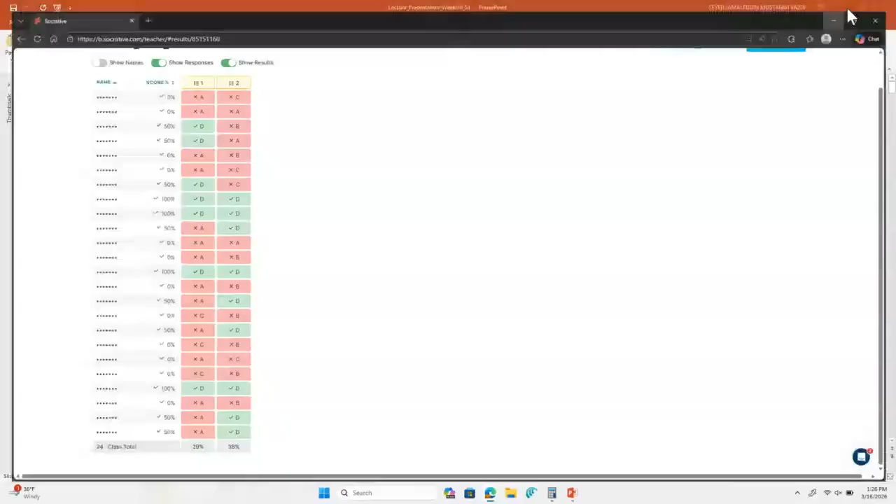For your reference, that's how much you studied. Look, first question, 29% answered correctly. Second question, 38% answered correctly. Okay, guys, please make sure you study the previous sessions and also the previous lecture. The final exam is coming soon.

Now, for the first question, the relative velocity equation VB with respect to A. If you remember, in the previous lecture we started to talk about general plane motion, and I explained that we can write the relative velocity equation. This is the relative velocity equation. We can also write this one as VA plus omega cross product of RB with respect to A. First, this one is the relative velocity of B with respect to A. It is correct.

For general plane motion, there is a combination of translational plus rotational motion. If you remember, for this general body, first move it, then rotate it. For example, this is A and this is the B point. This goes here, this goes here. This is the translational part. This is the rotational motion part.

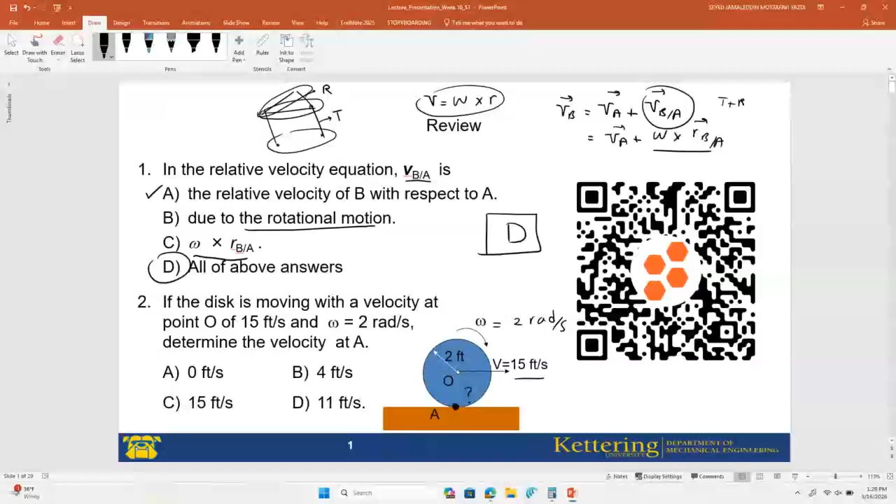Now, for the second question, this disk is moving with a velocity at point O of 15 feet per second. Omega is 2 radians per second. Then we want to find the velocity of point A. To find this one, look at the equation of motion that we can write, from the total one I wrote on the previous page.

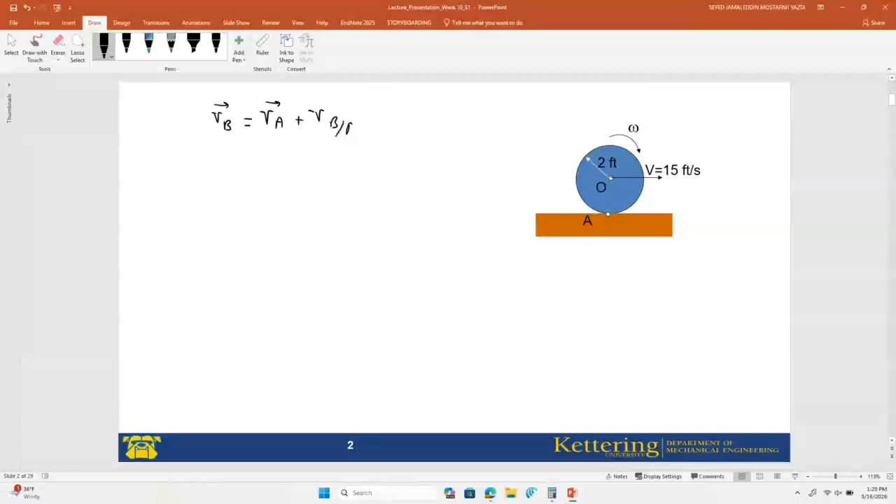Velocity of B equals velocity of A plus velocity of B with respect to A. I can write this one as velocity of A plus omega cross product of RB with respect to A. Now, here, as you can see, we have point O. This is similar, just instead of point B, I will replace it with O.

Just replace it with the O. Replace it with the O. That's it. Now, this will be VO equal to VA plus the VO with respect to A, or equal to VA plus omega cross product of the RO with respect to A.

Okay, now we just need to write them in terms of the vector form. Now, velocity of the O, it is 15. Which direction? This is X, this is Y direction, perpendicular to the screen, it is Z direction. Outward, this is Z. And also, these are I, J, and K. They are unit vectors along X, Y and Z. Now, this one, it is along the I direction. Okay?

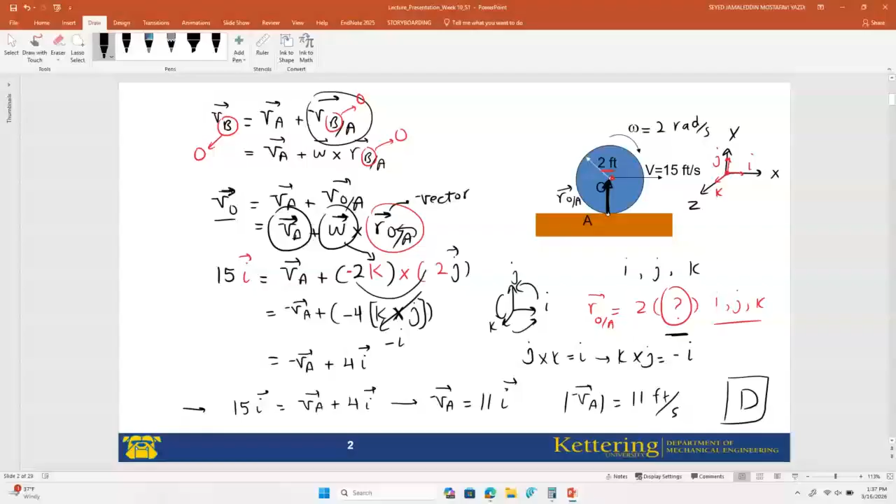Any questions? Any question, guys? Okay. Now, can I move to the next slide? Yes. Okay, Drew. Thank you, Josiah. Now, for this question, as you saw, this is D. Both are D. They are the answers.

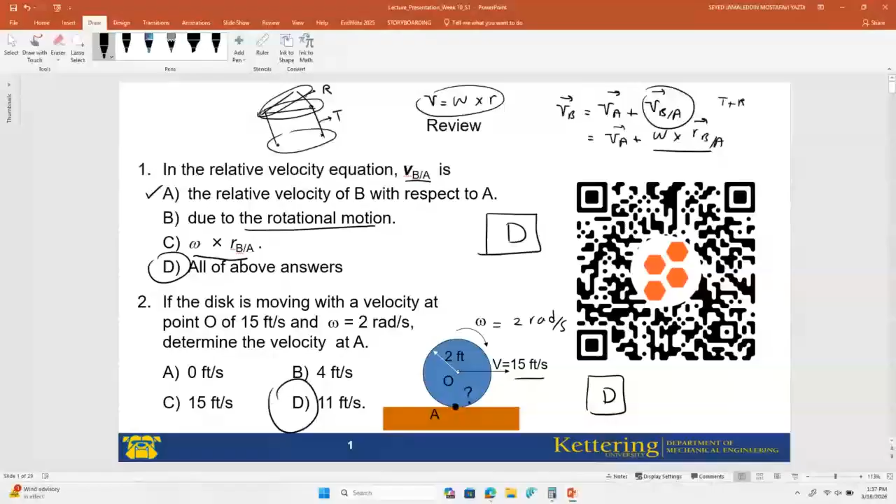Now, I want to announce about the final exam. Just a reminder that we will have the exam on Thursday, March 26, 10 a.m. Please bring your own calculator, and pen, pencil, that's it. I uploaded the equation sheets in week 11. You can access that now. You know how to use it. I will print it; you do not need to print and bring anything. I will bring it same as exam 1 and exam 2.

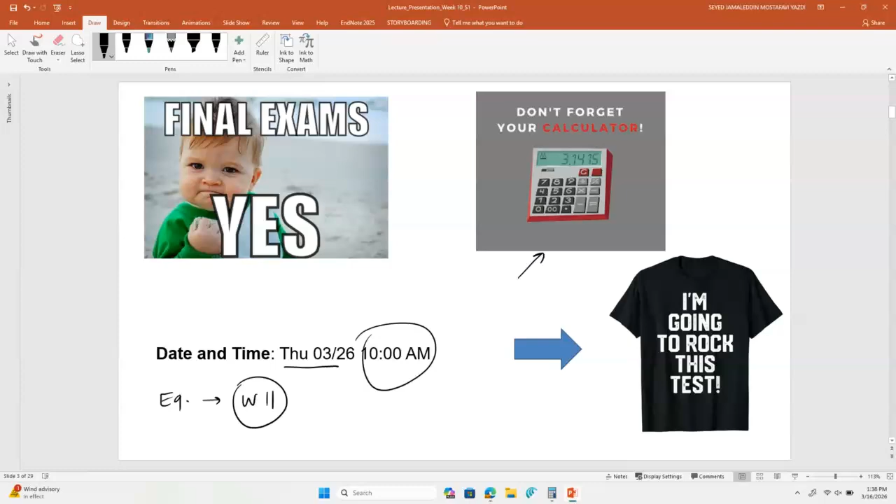The final exam will be cumulative, similar format to exam 1 and exam 2. For example, question 1 is multiple choice, and questions 2 to 5 will mostly come after exam 2. But you need to use some of the equations, directions, and coordinates you know. We will have a review session so you can be familiar with questions similar to the final exam. Some may come, or other ones will come. This is for the final exam.

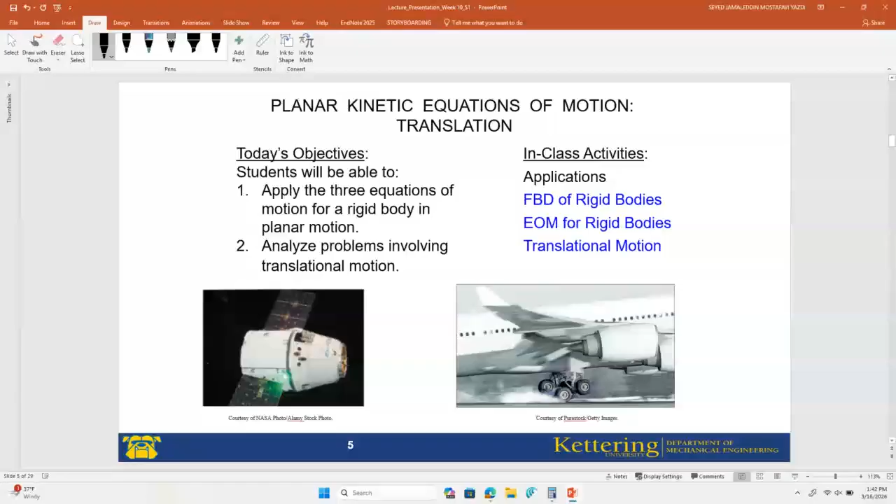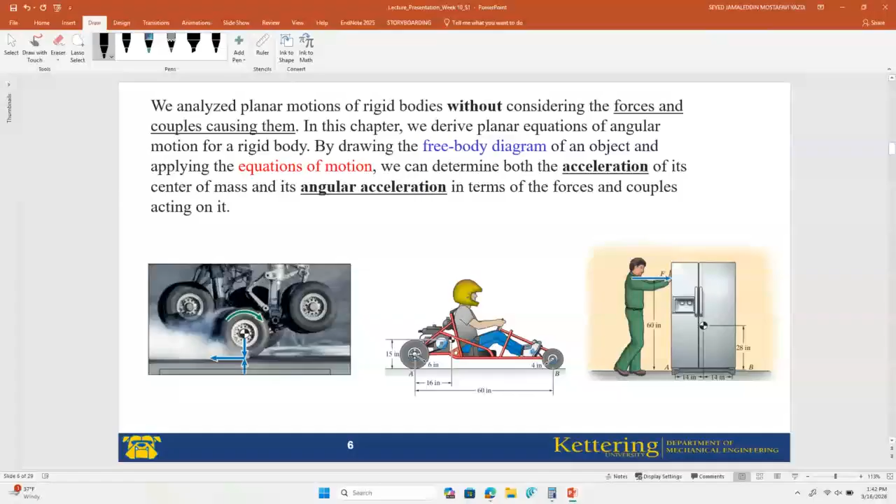These external forces are the rear normal force, the front normal force, weight, and frictional force. These are examples of these external forces. And also, you will see here that we apply the weight at the center of gravity. And also, there is a moment. Sometimes in the car example there is no moment. However, consider I apply a moment. This is a type of external moment. For this case, we want to write the equation of motion.

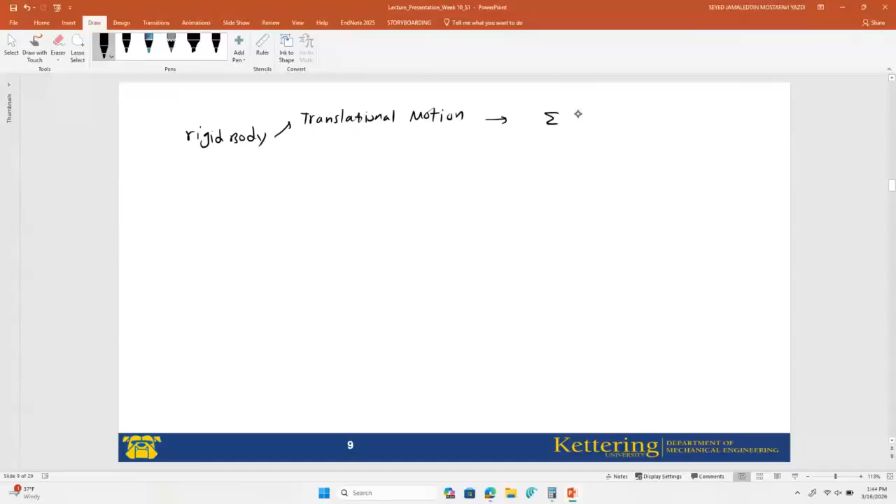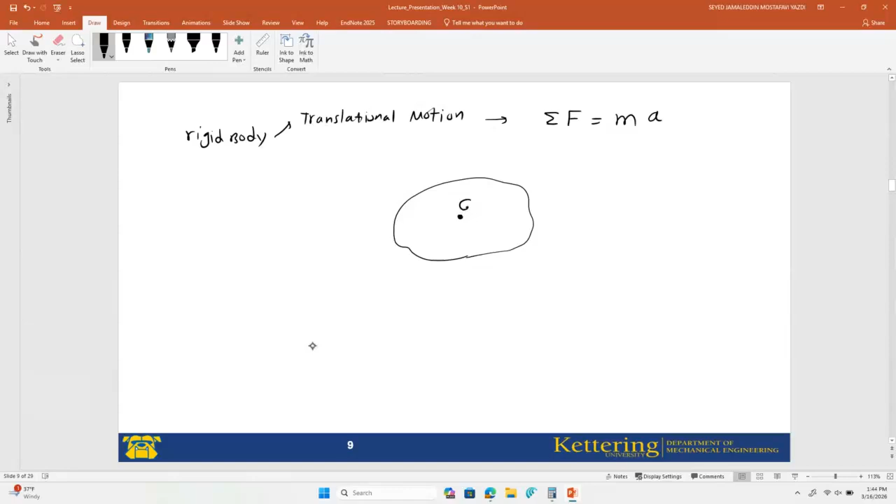First of all, as you learned before, for a rigid body that has a translational motion, we will use the equation of motion. You know about the equation of motion. It's the summation of the forces equal to ma, for this rigid body. Now, this rigid body has a point called the center of mass. G is the center of mass.

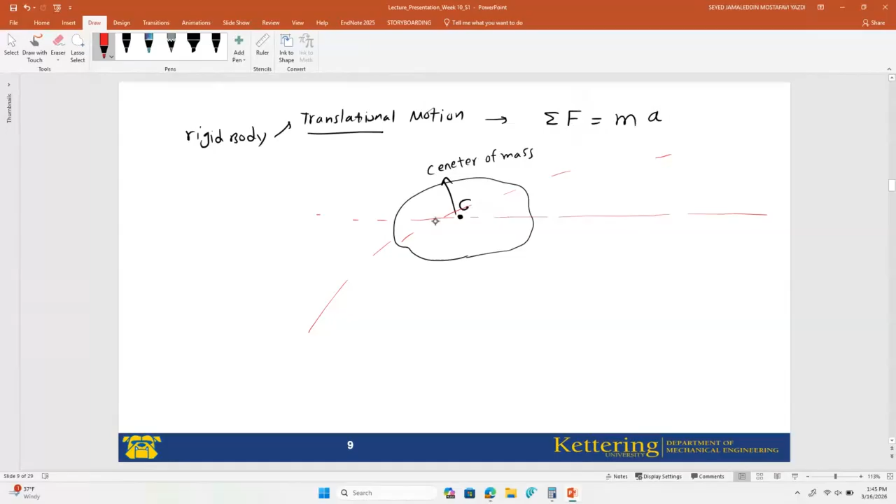A translational motion means, for a simple and basic case, if you follow the position of G over time, for example moving on a straight path, this is called a translational motion. Or G is moving along a curved path, for example this one. This one is also a type of curvilinear motion.

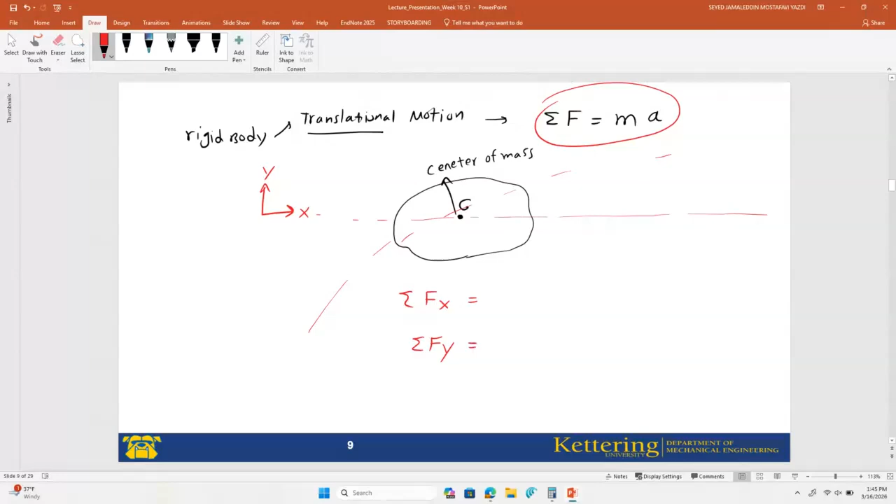Now, to write the equation of motion for this body moving in a 2D plane, in the x and y directions, we will develop the equation of motion along the x and y directions. We will find the forces along x and the forces along y, and they are equal to the mass of this rigid body times its acceleration.

Then instead of this acceleration, if you remember, we just used this one for one particle. Now this one has several particles. Instead of adding and finding this one for each particle, we will find the center of the mass. Then we will find the acceleration of the center of the mass along the x direction. This is the acceleration of G along the x direction.

Same as this one for the y direction. We can write this one, mass multiplied by acceleration of the center of the mass along the y direction. For example, this is m a_Gy. These are two equations that we will use for a rigid body that has a translational motion. Okay, you learned it from the previous lecture. This is nothing new, just a review.

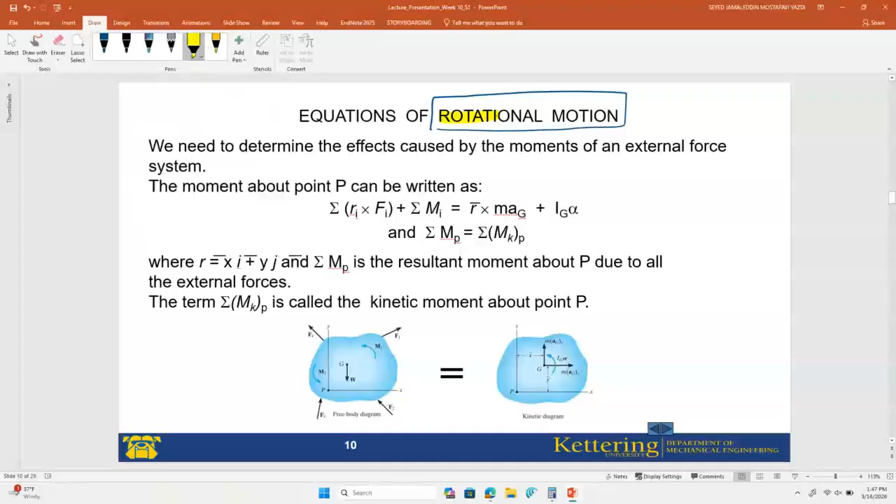Now we want to know how about a rigid body that has a rotational motion? What about the rotational motion? What type of equation should we use? For this one, we will use this equation. As you can see, this is an equation of motion for a rotational one. I will highlight this one. Oh no, this is not. This is only for rotational motion, as you can see.

What equation will I use? I will use this equation or this one. This is the general form of this one. These are equal; these are not two separate equations. These are equal to each other. And then, what are these equations? These equations are the moments about P. These are the moment equations. What is the moment? This is my question for you.

If there's a bar and I apply a force F, and this has a distance of L from the support, the moment at the support will be F multiplied by distance L. Similar to this one. If we find the moments of the forces and the external moments, left hand side, as you can see here, this expression is the moment of external forces. This is all external moments. For example, I can apply only a moment at the tip of this bar or beam.

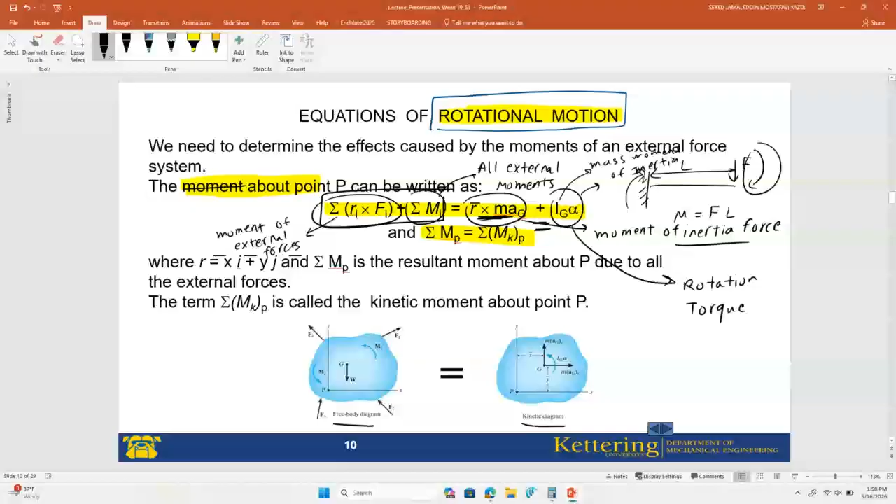As you can see here, we will draw a free body diagram and kinetic diagram for each problem. For the free body diagram, we will show the external forces and the moments. That's it for the free body diagram. In the kinetic diagram, we will show the inertial forces mA on the center of the mass. As you can see, there are inertial forces along x. It is m a_Gx. The inertial force along the y direction is m a_Gy. And also, this one is because of the rotation, I_G alpha. This is kind of rotation.

This G point has a distance from the point P. From the x axis it is y bar, and from the y axis it is x bar. These inertial forces have a moment. Why? For example, I just open one slide. Look, for example, a big one for you. This is the point P. This is the center of the mass. This point P can be any point on the body.

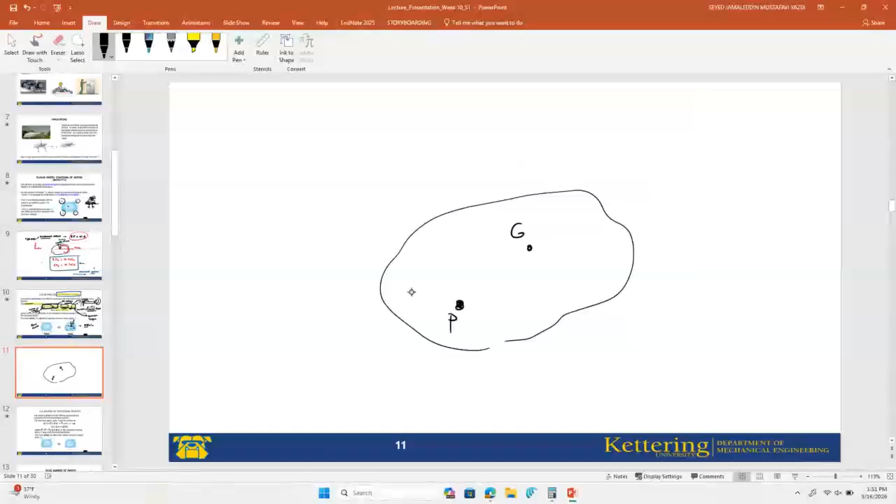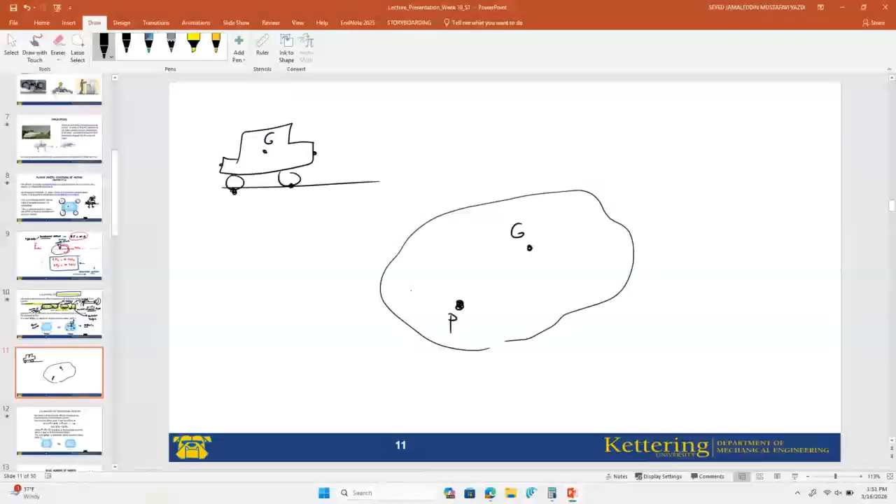For example, for the car, we have center of mass G. This point P can be on the rear tire, front tire, the front of the car, the back of the car. Any point can be this point. Now, this is the inertial one, m a_Gx, along x. This one has a distance along y. For example, I'll use that previous one for you. This one is y bar, and this point also has this distance of x bar from the point P. And also, this is m a_Gy.

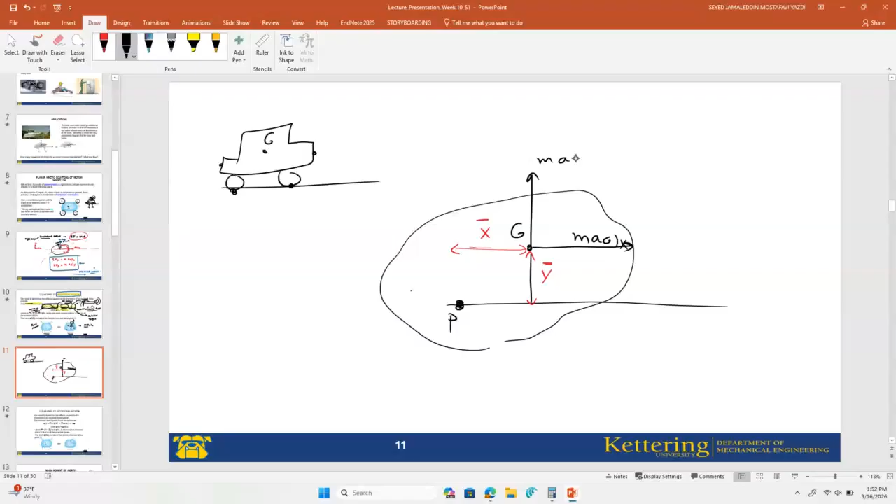Now, question. What is the moment of m a_Gx about point P? Can you write it in the chat? What is the moment of m a_Gx about the point P? It's okay, just write whatever. You do not need to write exactly what I write on the slide. It's difficult to write in the chat. If you write it, I can understand. What is the moment of m a_Gx about the point P?

What's the moment? m a_Gx times y, I_G alpha, okay, other students. I'm just collecting your answers. Please answer this one, thank you.

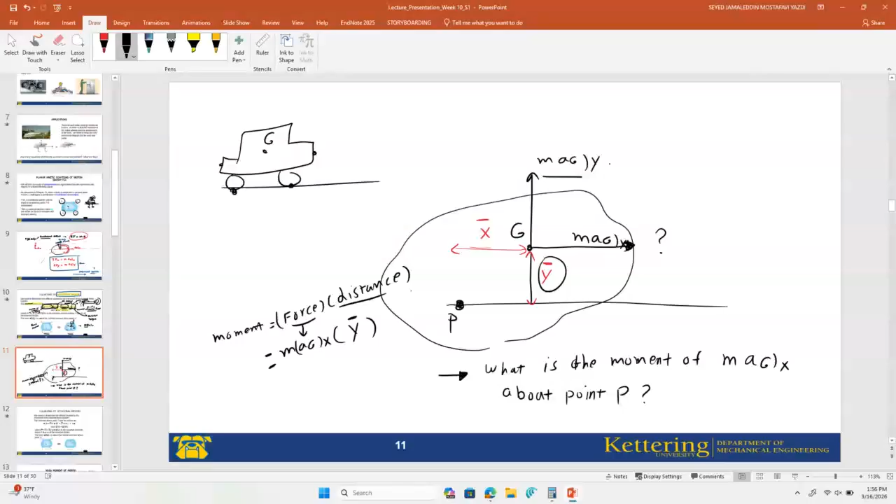Okay. Then maGy also has a moment. What's the moment of this one? It will be maGy multiplied by x bar. Okay. Now, this is the moment. These are not IG alpha.

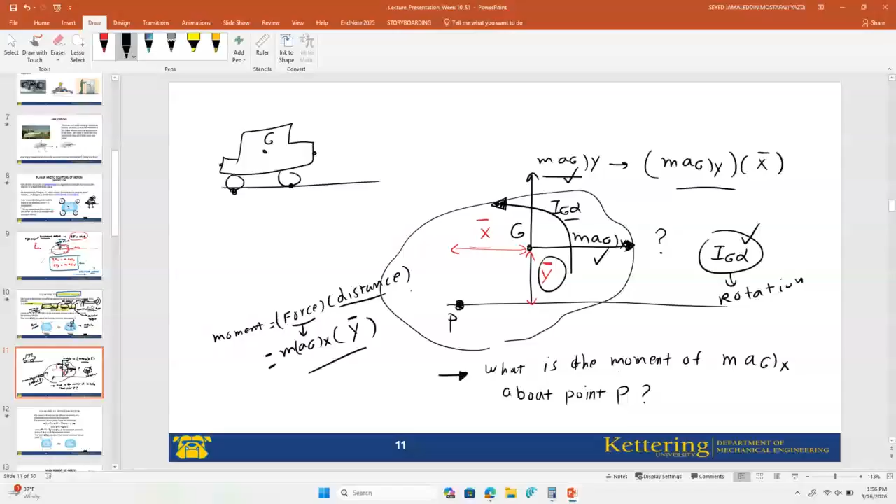IG alpha is because of only rotation. If you have a rotation, you have this one. This is something different. This we have because of the translation along x. This we have because of the translation along y. And also, if the body rotates too, we have IG alpha. Okay? This is different from maGx and maGy and different from the moment of maGx.

Now, this term is the moments of inertial forces. This term is IG alpha. That's because of the rotation. Then I start to talk about I, or the mass moment of inertia. This is mass moment of inertia I.

What is this one? If I want to rotate a body with the torque T, then this body starts to rotate with the angular acceleration alpha. We can relate T with alpha using I. This I is called mass moment of inertia. And the definition for I is the measure of resistance of a body to angular acceleration. Similar to the equation F equals ma, m is the resistance of a body when we apply F along the direction of the acceleration.

For example, if I have a pen with a radius of 2 centimeters, then I have a cylindrical one with a radius of 10 centimeters. Same height h, but different diameters. If I apply the same torque on both of them, I can see that this one is much more difficult to rotate than this one. Why? The I of this cylindrical one is more than the I of the pen or pencil.

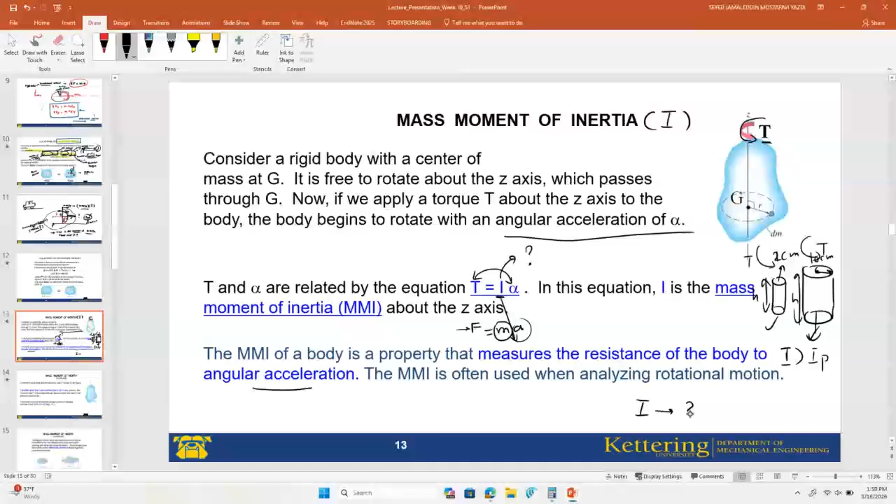Now, this question might come to your mind: for different geometries, how can we find I, the mass moment of inertia, how can we calculate it? To calculate I, we will use this integral. It's a mass integral, the integral of r squared dm. r is the moment arm, that is the perpendicular distance from the axis to the arbitrary element dm. This is an element dm.

If we're adding different elements on this rigid body together, the integral of dm will be m. Now this integral, if you calculate it, finding the radius of this one from the axis of rotation, this is an axis of rotation. If you find this integral, we can find the mass moment of inertia for different geometries. For example, for a cube, for a cylinder, or anything, we can find it.

Now, what is the unit of I? The unit of I, or mass moment of inertia, you can find from here. The unit of r is meter. This will be meter squared. The unit of m will be kilogram, so kilogram meter squared for the SI unit. And for US customary units, it will be slug foot squared. This is the unit of the mass moment of inertia. Okay.

Now, for certain geometries, as you can see here, for a thin circular disk and thin plate, these are the mass moments of inertia for them. You can find those in an appendix of the book. Let me see that. I have it. Yeah. This is the appendix of Hibbeler's book, for example.

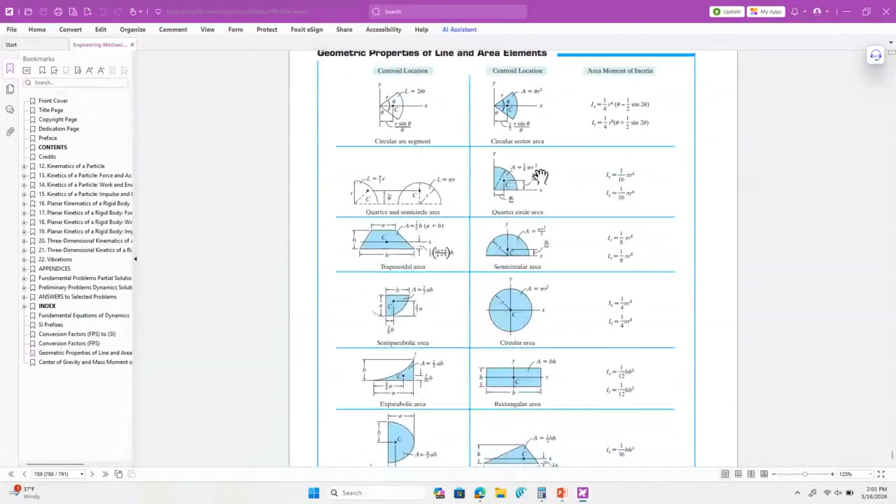As you can see here, for different geometries, if you refer to it, you can find the mass moment of inertia for them. As you can see, for circular sectors, circular area, rectangular one, or for 3D ones such as a sphere, cylinder, cone. For different geometries, these are given. What are they? Now, for example, Ixx is the mass moment of inertia when this disk is rotating about the x-axis.

The next one is the mass moment of inertia if this one is rotating about the y-axis. Similarly, this one is the mass moment of inertia if this one starts to rotate about the z-axis. As you can see, we can do this with your pen, for example. You can just rotate this one vertically, or you can rotate based on this axis or this axis. Based on this, there will be different mass moments of inertia.

For example, this is the z, based on here, this is x, this is the y direction. If you try to rotate them, they will have different ones. What are they? It depends. For example, for a circular disk, Ix will depend on the mass and radius of the disk. And for a thin plate, this depends on the dimensions of the thin plate along x and along the y direction.

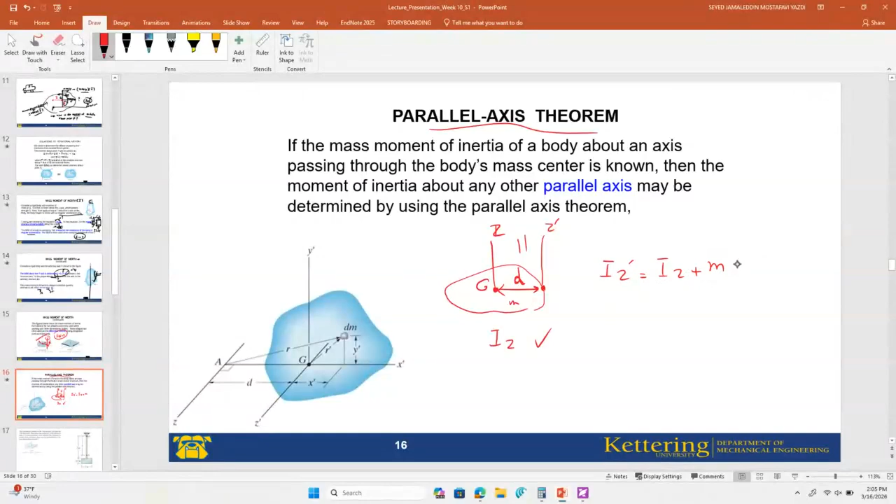You can see that these are parallel to each other, but they have a distance of d. Now, IZ prime will be equal to IZ, the mass moment of inertia about Z, plus the mass of this body multiplied by d squared. This equation is called the parallel axis equation. These come from the parallel axis theorem.

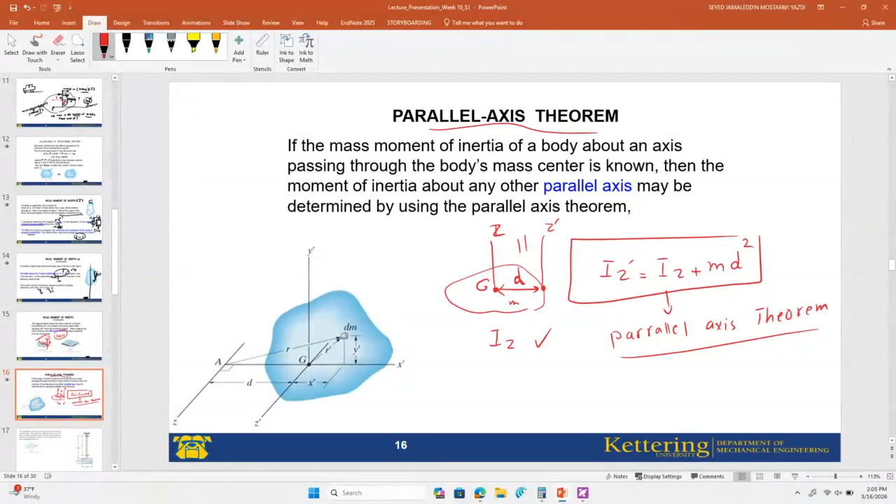Now, for the previous problem you saw here, for example, we do not know this one. I just mark this. We are looking for this, for a thin circular disk. We have IZ, but we are looking to find IZ prime. If I use the parallel axis theorem, IZ prime equals IZ plus the mass multiplied by the distance between Z and Z prime squared. Now, IZ is 1 over 2 mr squared, plus m times the distance between G and G prime, which, as you can see, will be the radius of this thin disk. It is mr squared. Instead of d, I just plug in r. Now, if you calculate this one, it will be 3 over 2 mr squared.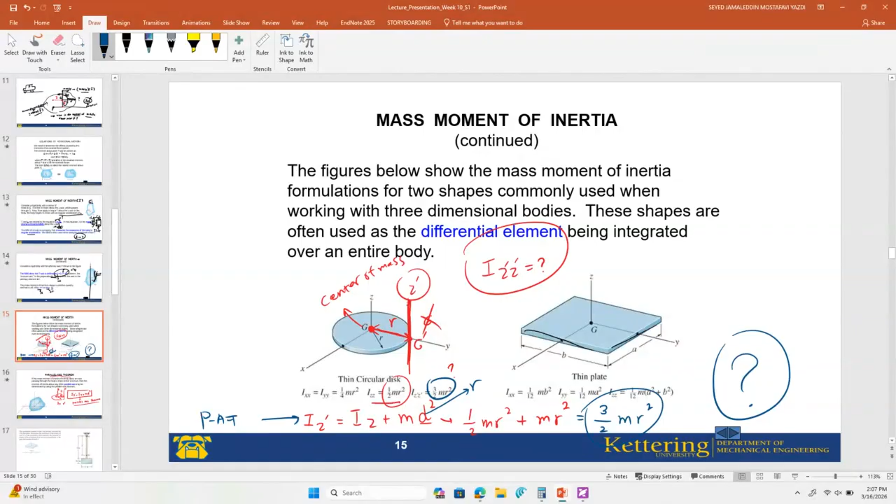Now, let's see whether this is correct or not. If I check it here, I use the parallel axis theorem. Using this equation, find the mass moment of inertia about Z prime, and I can find this one. Okay? Any questions? Any questions, guys? Any questions? No?

Okay. I'm confused about how you get from 1 over 2 to the... Okay. Look, this is step by step. IZ is 1 over 2 mr squared. This is plus m, and instead of d, I put r squared. Now this one is equal to, let me calculate. mr squared is common between these two expressions. From the first one, it is 1 over 2. From the second one, it is 1. 1 over 2 plus 1 will be 3 over 2. So this will be 3 over 2 mr squared.

Did you get your answer, Josiah? Okay, sounds great. Thank you. Good. Feel free to ask any question, guys. I'm happy to answer all your questions.

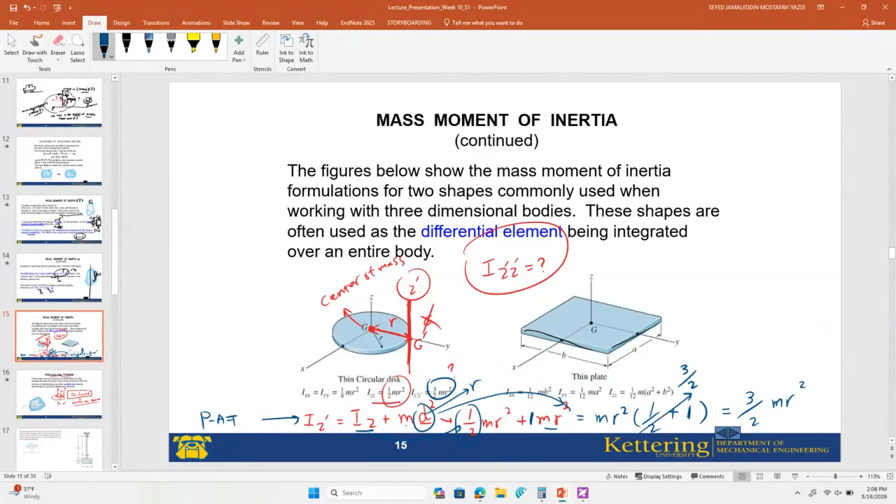I will show you how we can find it. If you want to write it down, take 1 or 2 minutes. Then I will start to solve.

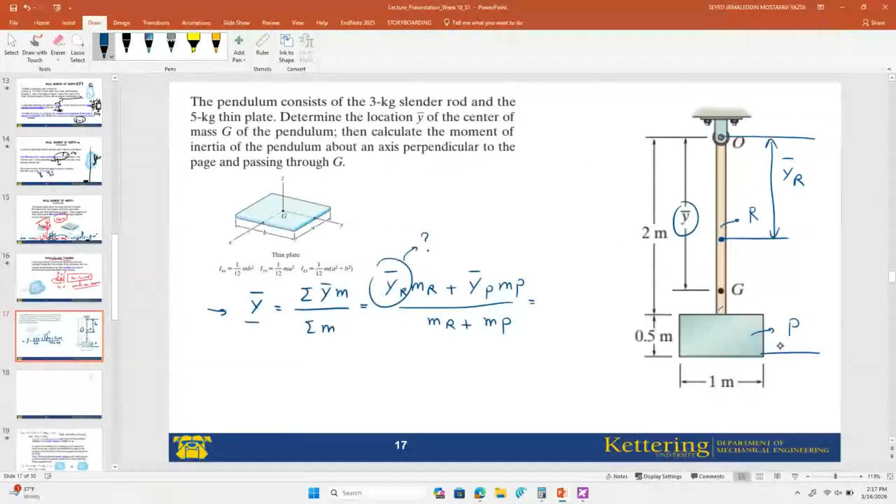Most of you measured from the bottom. If we measure from the bottom, the plate will be 0.25, as you saw. For the rod, this distance will be 0.75. But I measured from the top point, O. Whether you measure from O or from the bottom, you will get a similar answer. Now from point O, as I mentioned, y bar for the rod here is...

Sorry. Let me see. Some of you answered this incorrectly. This is 1. For some of your answers, from the bottom this should be 1.5, not 0.75. The center is at half of this bar, 1 from the top. From the bottom line, it will be 1.5. From the top point, y bar of the rod will be 1.

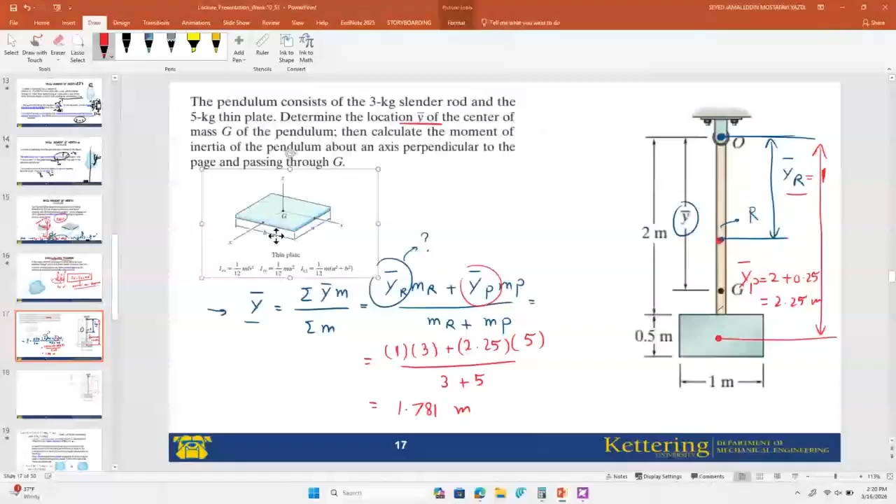First step. Then, next step, let me just capture this and bring it to the next slide. Now, whatever you have here will also be given to you for the exam. Okay. Now, we have the rod; this is given to you. We have the thin plate; these equations are given to you.

Now, what I need to do is find the mass moment of inertia about this point G that I found, 1.781 from the top. This point is different from the center of mass for the rod and the center of mass for the plate. This is the reason we need to use the parallel axis theorem. To find this, we will write the parallel axis theorem.

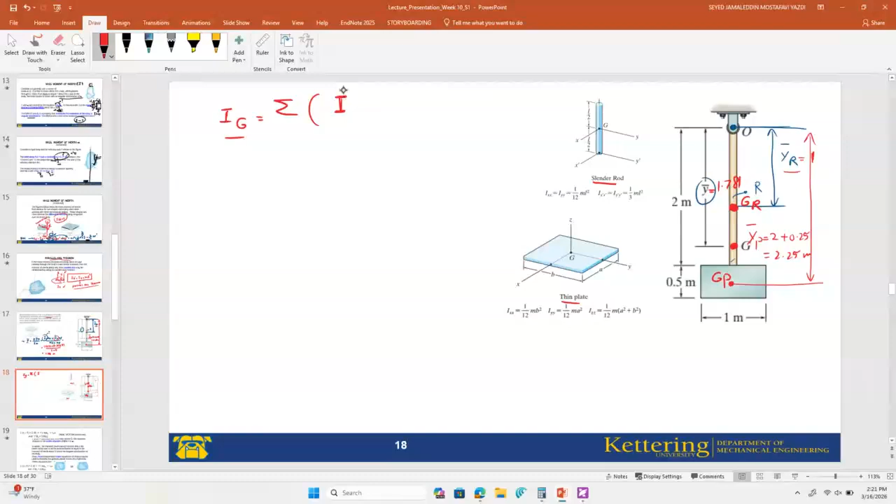What is it? It is the mass moment of inertia about the center of mass for each of them plus m, their mass, multiplied by their distance squared. What does this mean? I will write Ig plus md squared for the rod. Also, I will write this for the plate. Both are different, as you can see here.

Their points are different. If you imagine this, I want to rotate it about this point. However, the mass moment of inertia about this point is different from the one about this point. Then we want to find their distance. First for the rod: Ig, the mass moment of inertia for the rod, plus m dr squared. This is dr, the distance between them.

Now, this is the dr for the rod. The mass moment of inertia for the rod, as you can see here, is given about x, and x coincides with the z direction we are looking for. This is the mass moment of inertia we are looking for: 1 over 12 m L squared. Do not confuse it with this one. This is the mass moment of inertia plus m dr squared.

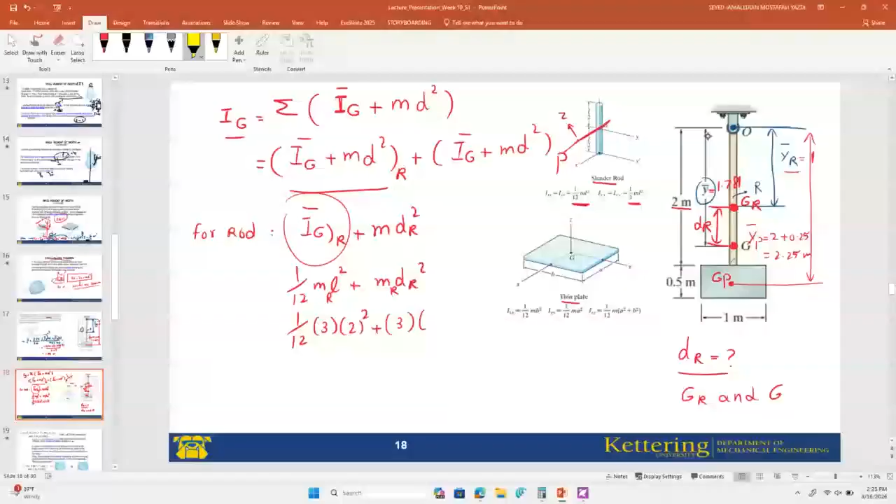0.781. Okay. Other students, how much is their distance? This one is 1.781. This distance is 1. Now we want to find this distance. Look, here is 1.781, this one is 1. How much is it? Okay, 0.781. Yes, it's correct. It is 0.781 squared. This is for the rod.

Then for the plate, it is IG, about the center of mass of the plate, plus the mass of the plate multiplied by D of the plate squared. This is the D of the plate, the difference between here and here. The IG of the plate is about the Z axis; if you rotate it, it rotates about Z. It will be 1/12 M (A squared plus B squared) plus the mass of the plate times the distance of G from the G of the plate squared.

This is equal to 1/12 times the mass of the plate, 5, times A, 0.5 squared, plus 1 squared; these are the length and width of the plate. Plus the mass of the plate, 5, times their distance. This one is 2.25, and this distance is 1.781, so their distance will be 2.25 minus 1.781, squared. Now, let's calculate them together.

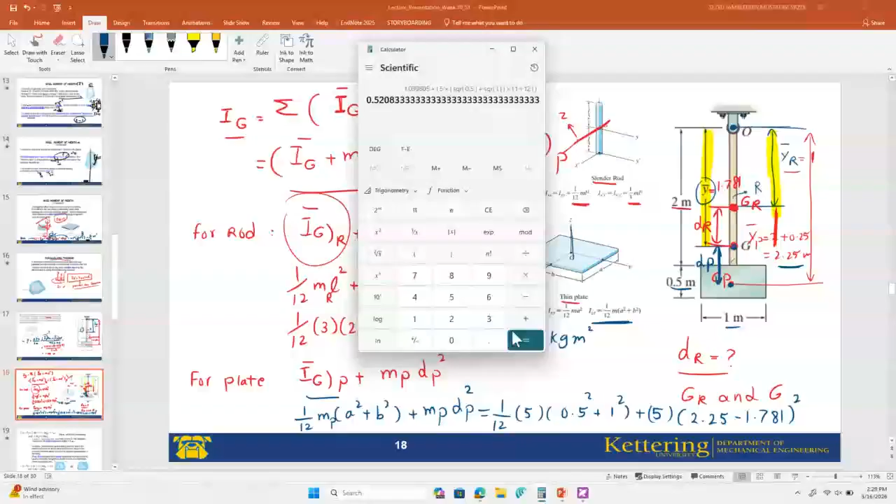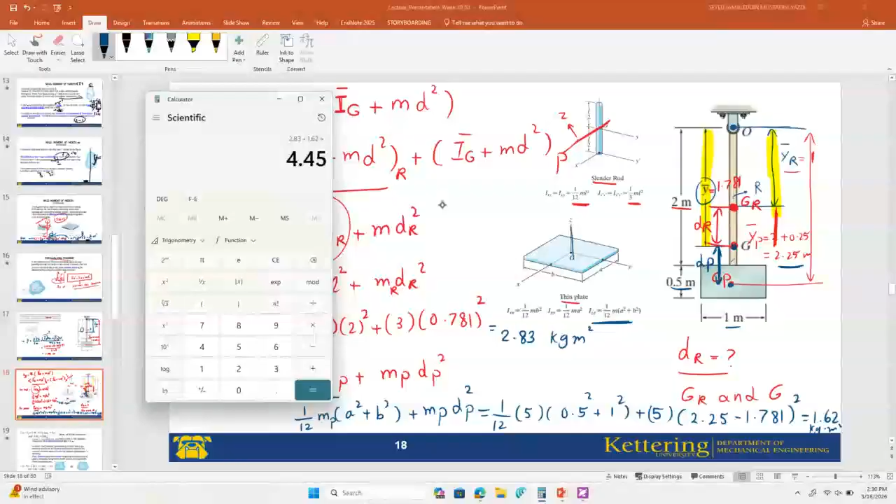This one is just this. Also, this multiplied by 1 divided by 12. This is this. Then this one is 1.62 kilogram meter square plus 2.83, just like adding them together. 2.83 plus 1.62 will be 4.45. Means that IG, the adding of these, 2.83 plus 1.62, is 4.45 kilogram meter square. This is the answer.

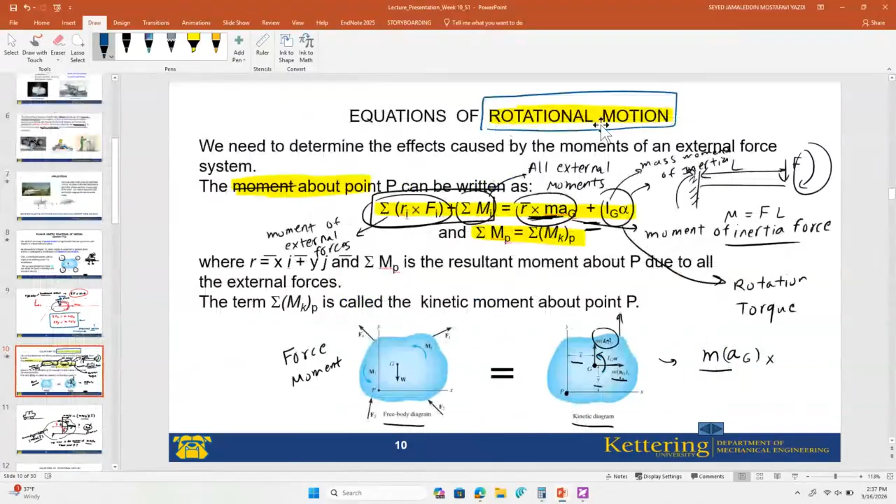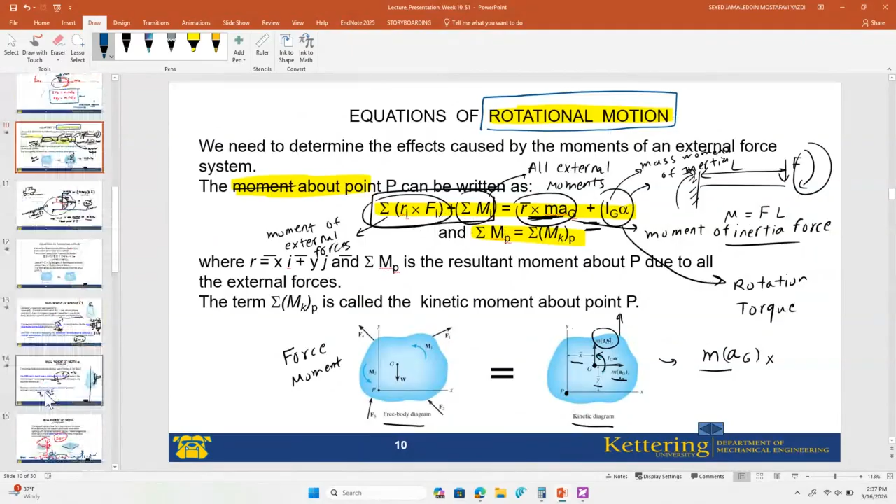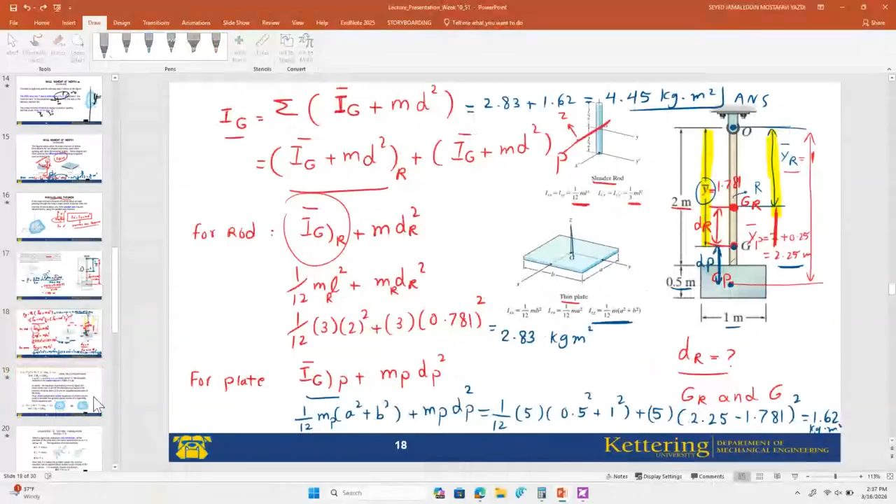Now, what we're learning here, and I explain it. This is the equation of the motion, equation of the rotational motion. These are equal to each other. Just I want to show you here this equation. As you can see here, these are equal. This means this one. Okay. Now, what is this?

It's the summation of the moment of external forces, and this is the moment of inertial forces. Now, about what point? About point P. This P can be any point.

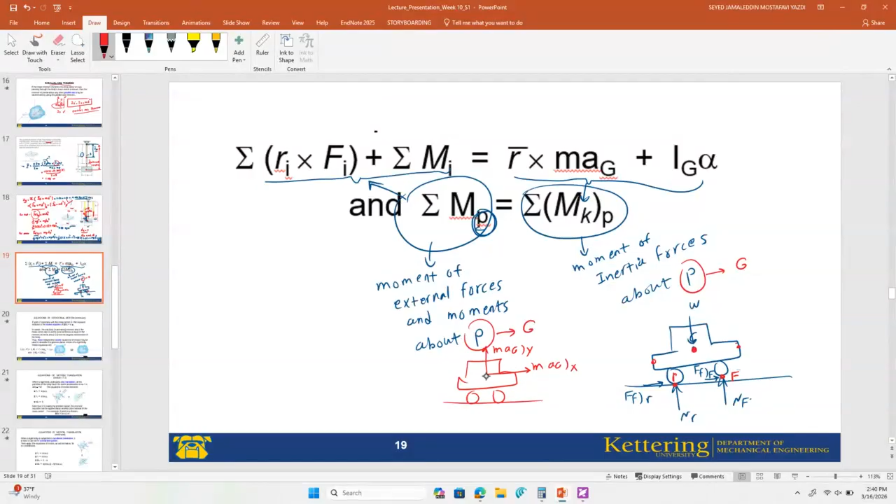Now, just delete this. If the point P coincides with the mass center G, means that instead of P, we find the moment of all forces about the point G. Now, if we find the moments of inertial forces, for example, if I draw the kinetic forces for this car, it is MAG X along X. This is MAG Y. This is the center of the mass.

Now, can somebody tell me how much will be this term if we find the moment of MAGX and MAGY about the center of the mass? How much is this expression? Please write in the chat. How much is the moment of MAGX and MAGY about G? Nobody knows?

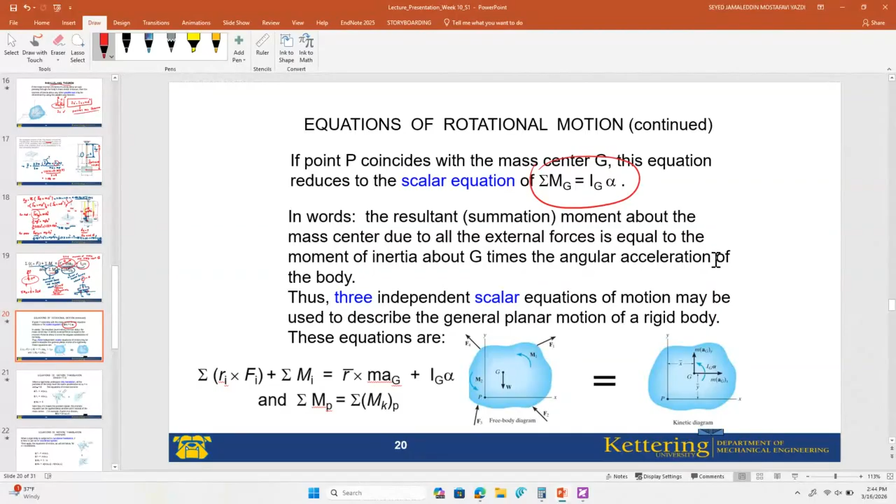Means that for this one also, all the forces pass through G, so this term will be 0. So I can write the left hand side, summation of the moments about G, equal to 0 plus the only term we have, IG alpha. That's the point. Summation of the moment about the center of the mass due to all external forces is equal to moment of inertia about G multiplied by angular acceleration. This is the explanation for this equation.

Now, we have 3 equations for general plane motion of the rigid body. What are the equations of motion? As you learned, summation of the forces along x equal to m aG along x. Summation of the forces along y equal to m aG along y. Then summation of the moments about G equal to IG alpha.

These are three equations for general plane motion. This is because of the translation. This is because of the rotation. This can be used for general plane motion. Now, I can also summarize and simplify those equations.

How? For example, for a translational motion, these are the equations that we have: sigma Fx equal to m aGx, sigma Fy equal to m aGy, and also summation of the moment about G equal to IG alpha. Now, for the translation, we know that this one doesn't rotate, so alpha, the angular acceleration, will be 0. For translation, there is no rotation. Now, if this one is 0, this will be 0. This is the reason the summation of the moment about G will be equal to 0, as you can see from here.

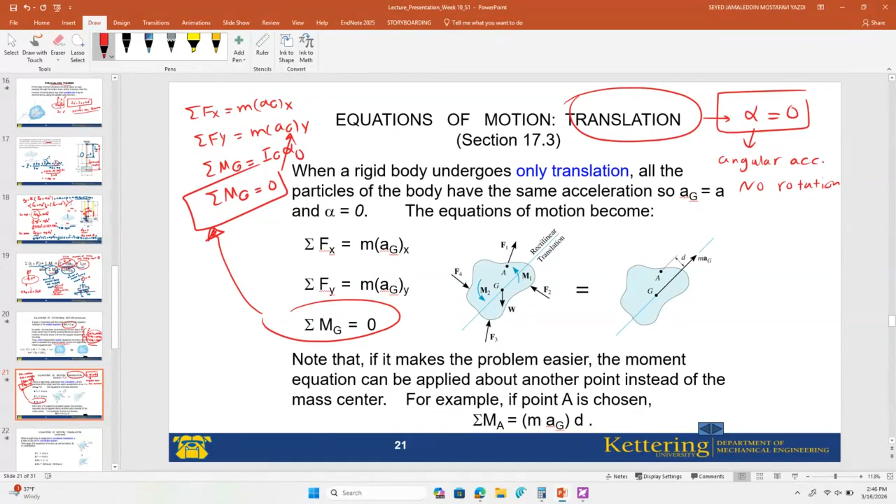Now, if you want to use another coordinate system: for previous ones we used, for example, rectilinear translation, the car just moving along a straight path. How about the car moving along a curved path, as I solved this problem considering the car as a particle? To use this one, we will use a tangential and normal coordinate system. Then we can write the equations of motion in the normal and tangential coordinate system instead of the xy coordinate system.

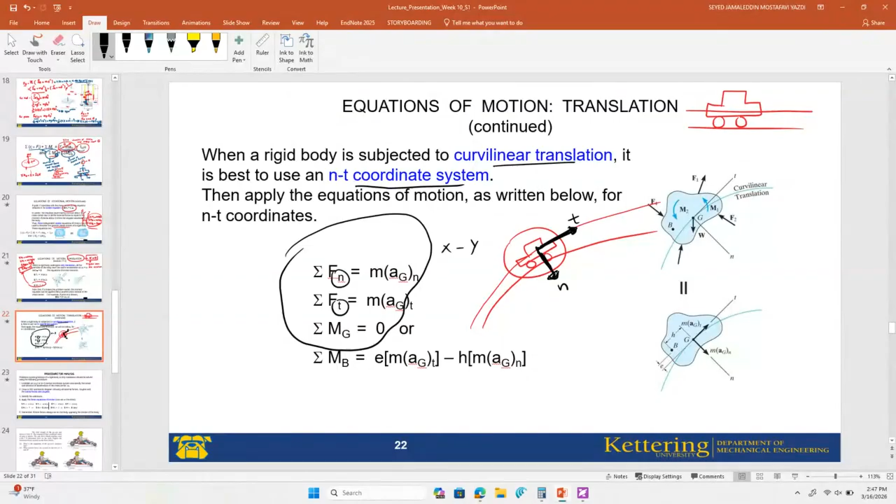Okay, this is how we can find and use it for the equations of motion, for example, for curvilinear motion in the normal and tangential coordinate system. Now, what is the procedure for the analysis? First, you need to establish what type of coordinate system you want to select. This is an important one. And where is the mass center of the body? Then draw the free body diagram and kinetic diagram.

Next step is to identify the unknowns. What are the unknowns? For example, normal force, acceleration, applied force FP, whatever. Are you looking to find velocity? Are you looking to find the time? These might be the unknowns for the problem.

Now, the three equations of motion, along x or along the normal. If you selected the xy coordinate system, you need to use these equations. If you take moments about G, this one is equal to 0. If you take moments about any other point, and also use the normal and tangential coordinate system, you need to use these equations. Also, make sure you consider the frictional force in the opposite direction of the motion. Okay, this is the procedure. Now, I want to show you this on different examples. Okay, now the first one.

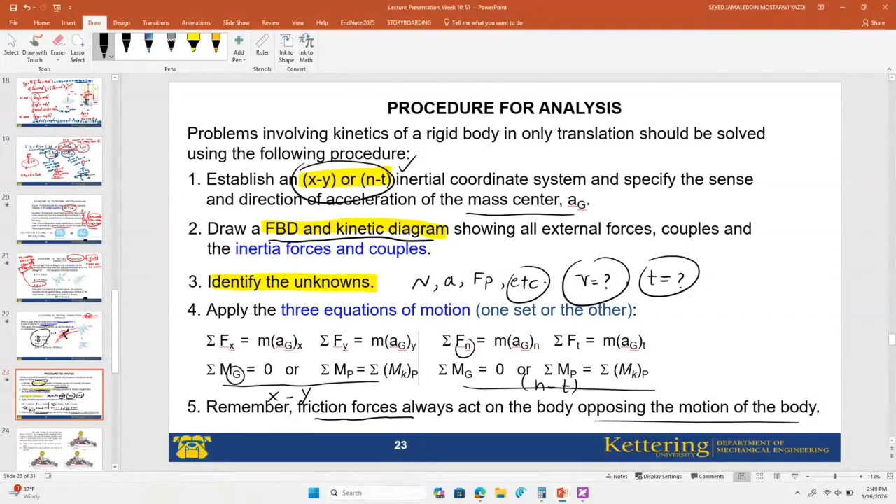The total weight of the go-kart and the driver is 1068 Newton. The location of the combined center of mass is here, as you can see. The rear drive wheels together exert a force of 106.7 Newton on the track. We neglect the horizontal force exerted on the front wheels. I'm looking to find the acceleration of the go-kart and the normal forces applied to the tires at A and B, the front and rear tires.

As you know, with those go-karts, if you're part of the competition teams and you design them, you want to see how they work at different accelerations and what normal forces apply. Then based on these normal forces you will design and simulate the forces applied to the structure. This is how you can apply it, for example. I will give you 1 to 2 minutes to read and write, then I will start to solve this problem for you.

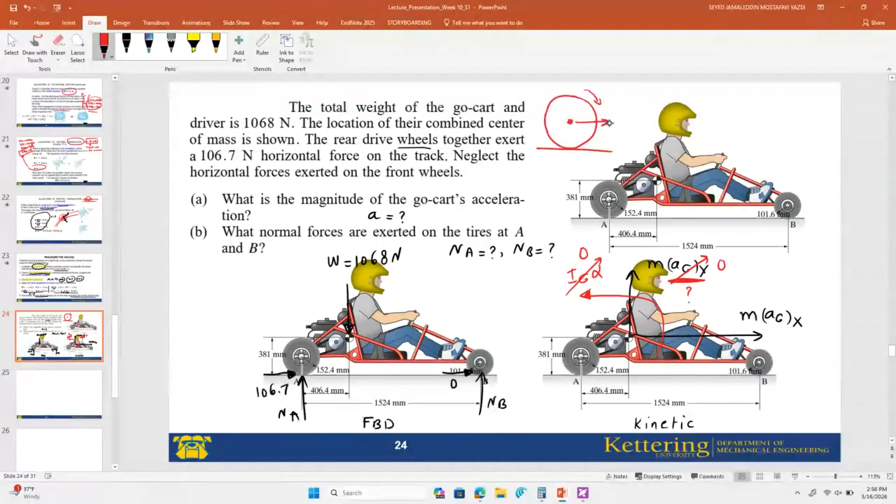Yes, it is correct. This one, it is zero. Also, there is no rotation. I just write this one in the general case. If there is some rotation, we have to consider Ig alpha. For example, for a tire, a tire can rotate simultaneously while moving in this direction, or there is a slip. For the tire, we have Ig alpha. But for this case, there's no rotation, so Ig alpha will be zero.

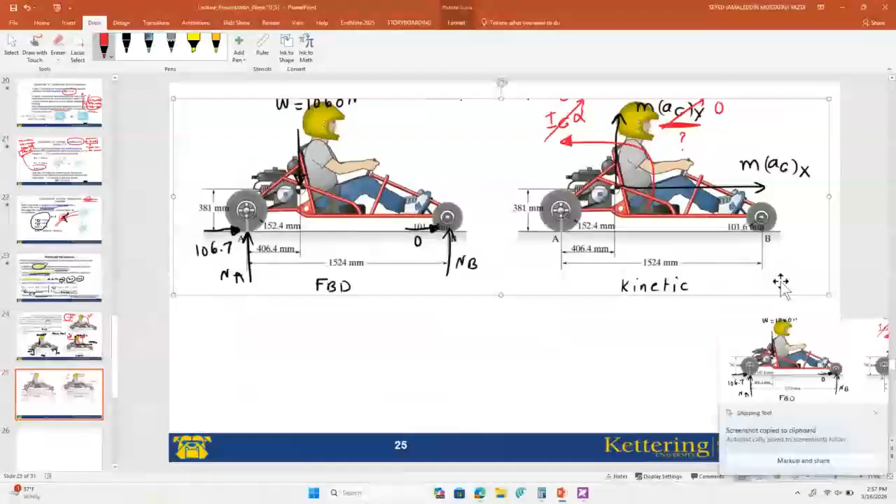Now, we have this kinetic diagram and the free body diagram. Please, all of you pay attention, because at the end of this example I will ask you to solve this problem for another condition, and I will ask you to submit it in Blackboard. Please focus, and if you have any question, let me know so I can answer.

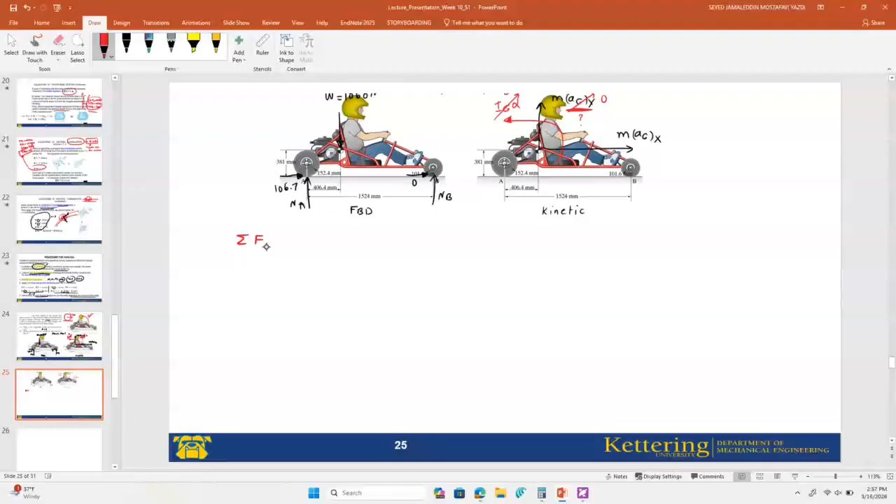Now, first for this problem, summation of the forces along x equals m a_Gx. Along x there is only one force, 106.7, equal to the mass, the weight 1068 divided by 9.81, multiplied by the acceleration along x. From this you can find the acceleration of G in the x direction: a_Gx is 0.981 meters per second squared. This is the first equation.

For the second equation, summation of the forces along y equals mass times acceleration of G along y. Along y we have the normal forces and the weight downward. Normal force at A plus normal force at B minus weight equals 0, because a_Gy is 0. So N_A plus N_B equals the weight, 1068 Newton. But this equation has two unknowns, so we need one more equation.

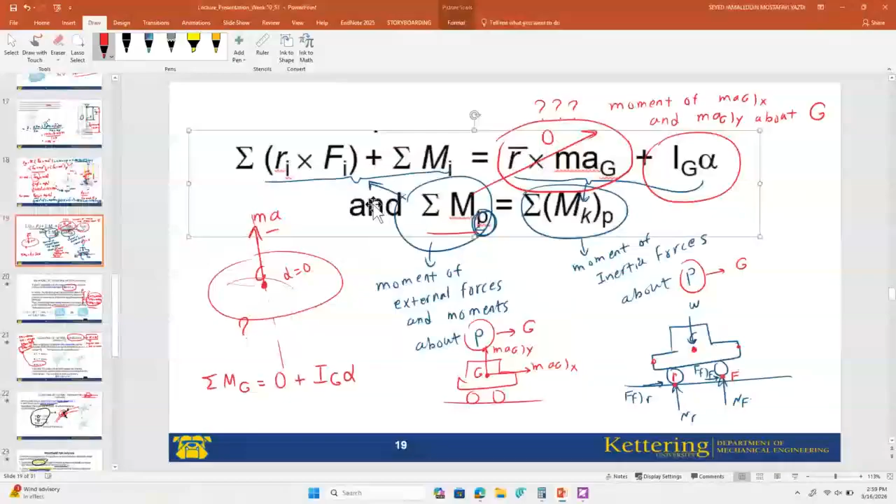What is the equation? Look, I copy and paste it here for you. Summation of the moment about any point. For example, I will find the moment about point A instead of P. Summation of the moment about point A equals summation of the moment of inertial forces about point A.

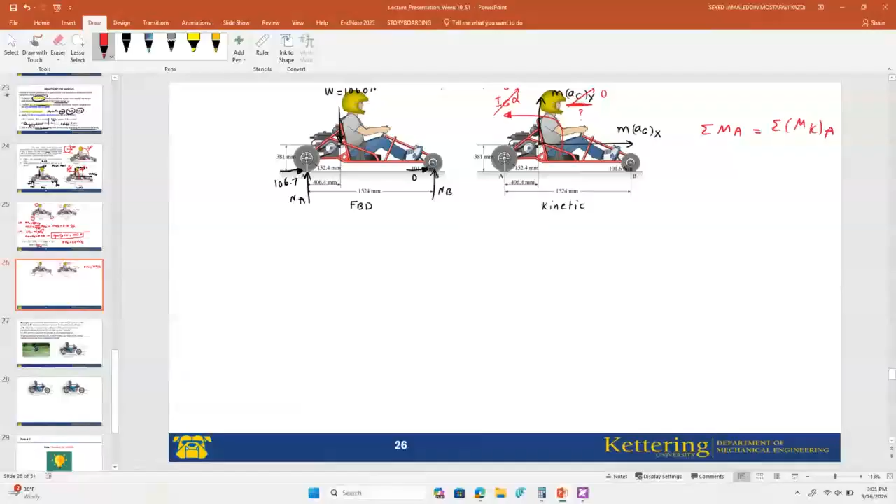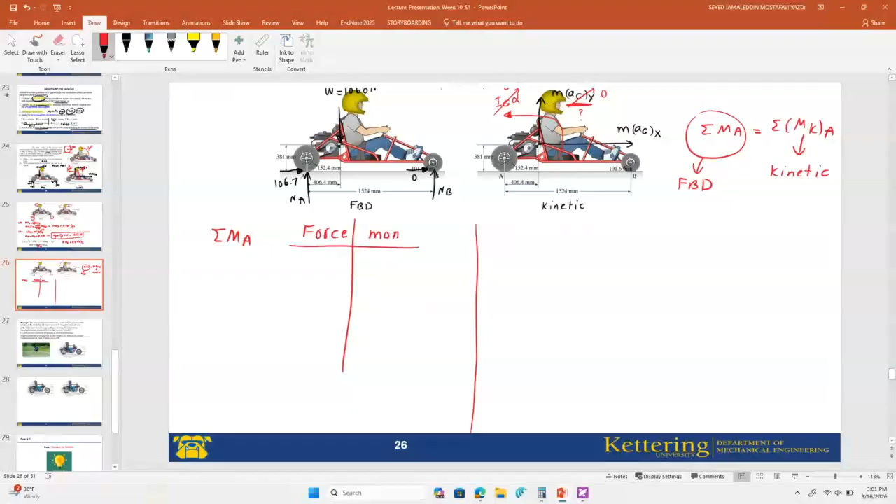Now, I copy and paste it here. Summation of the moment about A equals summation of the moment of inertial forces about A. For this side, I look at the free body diagram; for the other, the kinetic diagram. First I split it into two parts. For summation of the moment about A, I make a table like this: force and its moment about A.

For forces, look only at the free body diagram. We have normal force at B, normal force at A, 106.7, and the weight. The moment of N_B about A is N_B times this distance, 1524 divided by 1000 to convert to meters. What is the moment of N_A about A? Zero, correct. What is the moment of the 106.7 force about point A?

How much is it? Correct, Lorenzo. It is correct, zero. Because all passing through this point. You will see that by selecting the point A, I can do a kind of smart thing to solve this problem. Why? By selecting the point A, I will eliminate one of my unknowns. Because already you will see in here, there's no NA.

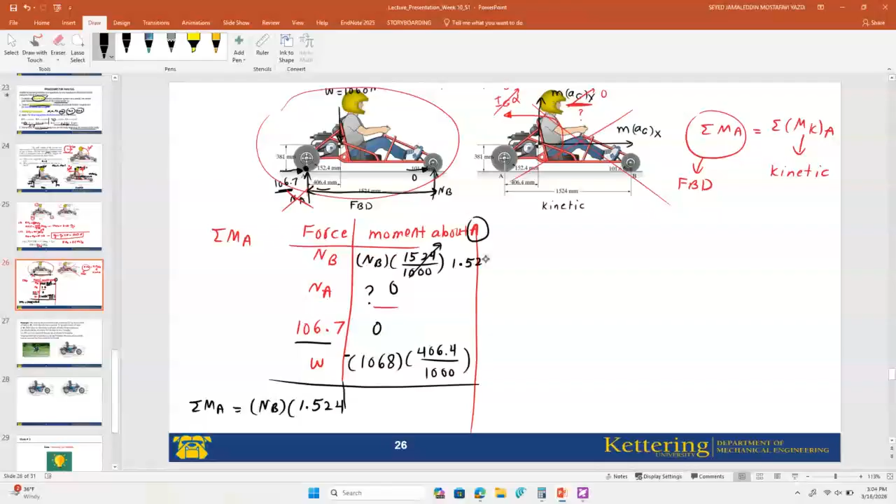Now I add them together, summation of the moment about A, it is normal force of B multiplied by 1.524. I just convert this one to meters. Also, minus 1068 multiplied by 0.4064. This is the left-hand side, check mark.

Right-hand side, summation of the moment of inertial forces. Same. I want to find this one. How? Make a table, look like this. Now, inertial force. Then we want to find their moment about A. What I have, just look, this is the general one: MAGX, MAGY, IG alpha. These are what I have on the inertial force. Just look on this one. Do not look at the other free body diagram. Now for this problem, this is 0. Also, there's no rotation. This is 0.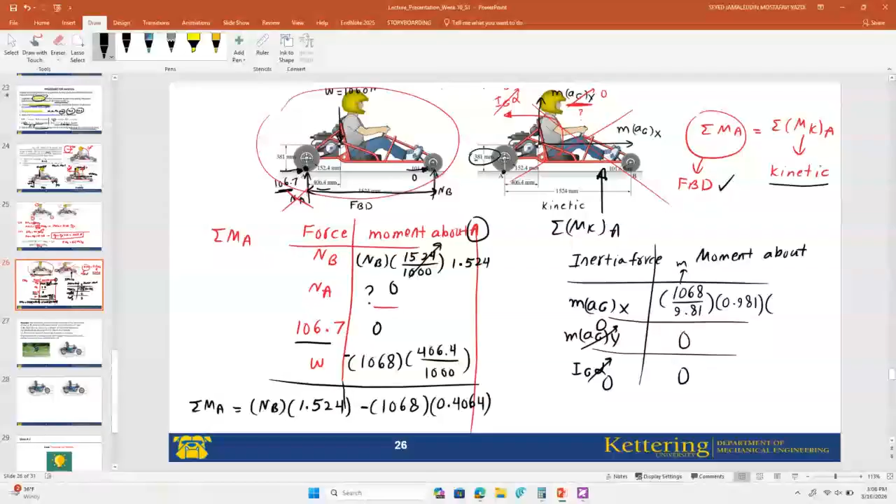This is 0. For this one, MAGX here has a vertical distance of 381 from A. This will be M. We have the mass of this one. It is 1068 divided by 9.81. This is the mass. AGX, we found it, 0.981. Then the vertical distance, it is 0.381.

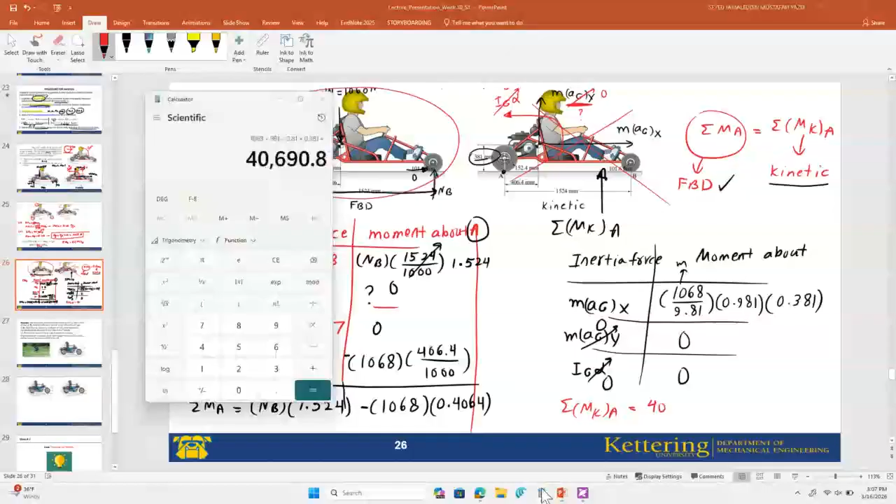Now, if I write this one in another color, summation of the moment of the inertial forces about A will be equal to this one. We will calculate this. It is 1068 multiplied by 0.981 divided by 9.81 multiplied by 0.381. If we calculate this one, the total will be 40690.8. This is the moment of this force. Now, moment also is Newton meter.

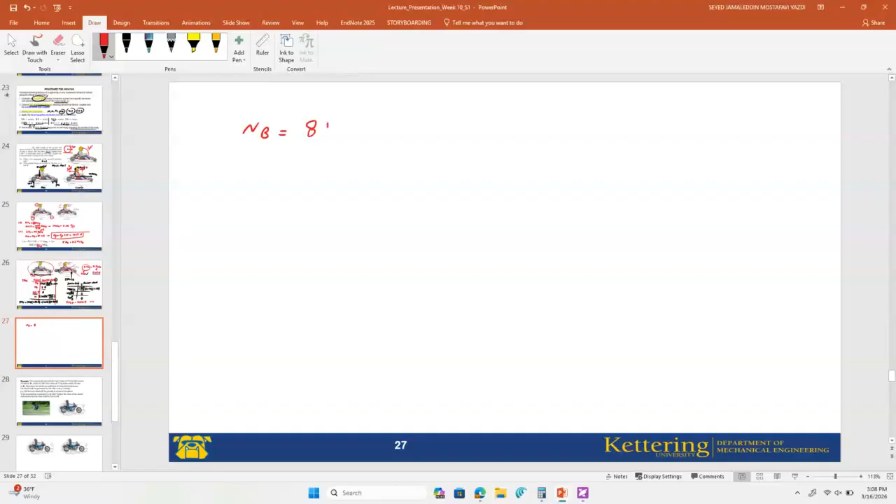Then I will equal this one with this one. If I equal this with this, you can find the normal force of B. If you calculate it, let me calculate on the slide here. The normal force of B will be 810 Newton. Then I will put into this equation that we had, normal force of A plus normal force of B equals 1068. Then normal force of A will be 1068 minus 810. If we calculate this one, normal force will be 258 Newton.

Okay. Now, what I want to do, any questions? If you want to write it here, you can write it then. Any questions, guys? No questions? I think you calculated the kinetic moment right.

Where, Josiah? This one. Thank you. Let me check it. Okay, yes. Thank you, Josiah. 1068. Yes, right. Thank you. You're correct. When I wanted to divide, instead of 0.381, I might have just put 381. This will be 40.6908 Newton. Thank you.

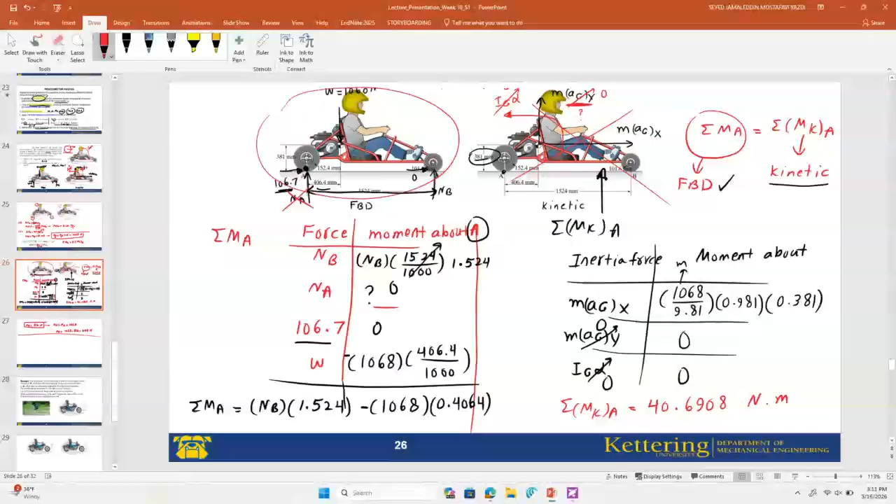Now, you learned in this example how to solve a problem for this general type of motion, how to write the equation of motion along x, along y, as I mentioned here. Then, before I give you a class participation problem, one thing I announce, then I will start.

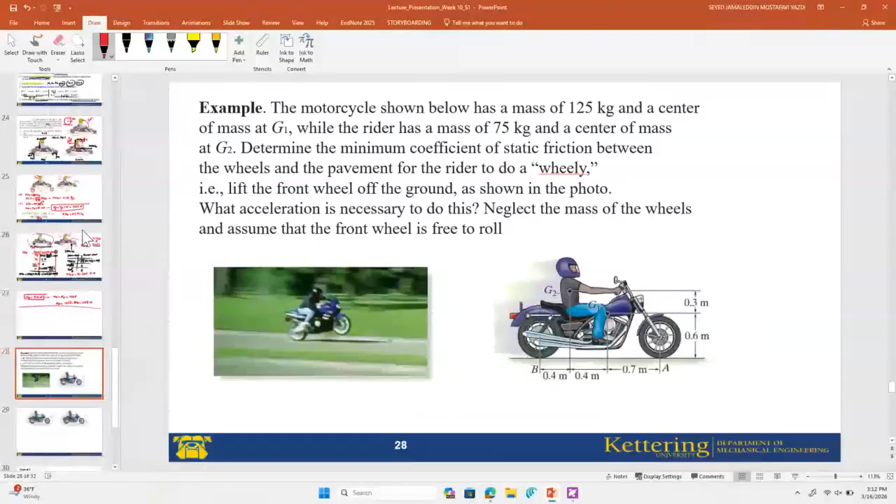Okay, I will solve this example and other examples, and I will give you similar examples, just similar to this one, to find and use the equation of the motion along x and y, and similar to this problem I will give you for the quiz. Make sure you prepare yourself.

Also, I will put some extra problems for you today to solve, and you also have homework, as I just posted the previous week. You already know about 2 questions. The remaining one is regarding this one, which you can solve. Please practice it. We will have the quiz in the next session.

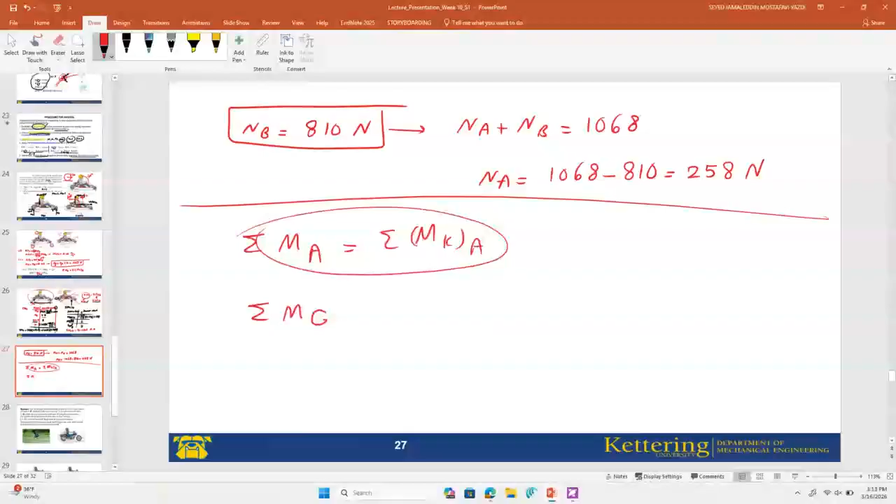Now, look, I solved this problem for you. I will share my screen again. I solved the problem with the summation of the moment about the point A. Now, what I want you to do is find the moments about the center of the mass. Instead of A, just put G, and use this one about G. Calculate this again about the center of the mass.

Then write it on your paper, whatever, and upload it. This is the class participation, because I want to see who participated in the class. Upload your answer until 3:30 p.m. today; this is a simple one. In week 10, I will create this here. If you do not participate, I consider you absent from my class. As I can see, some of the students do not participate. Some of them just open this and then they are not present. Please participate in the class.

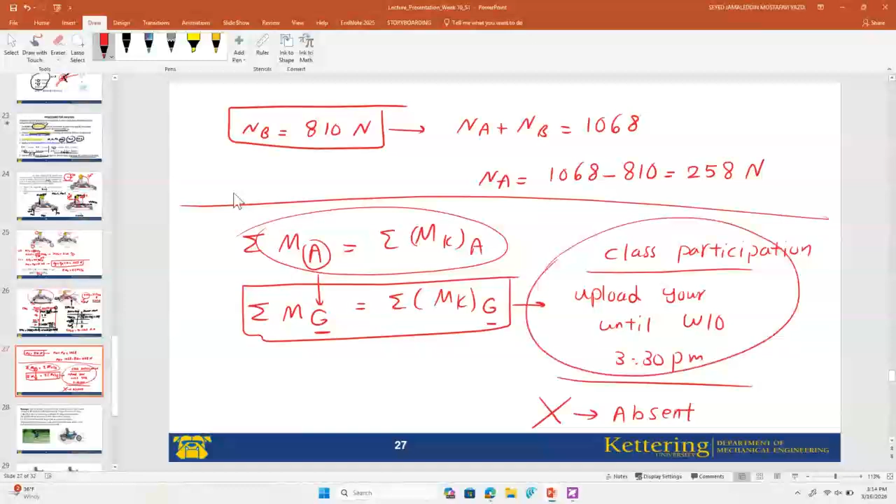This is the problem that I have, just in front of you. I will find the moments about G, this point. Whatever I did here, the summation of the moment about G is the summation of the inertial forces about G. That's it. Do it, write it on your paper, and submit it in Blackboard. I will create it on Blackboard now in week 10. Let me just create it.

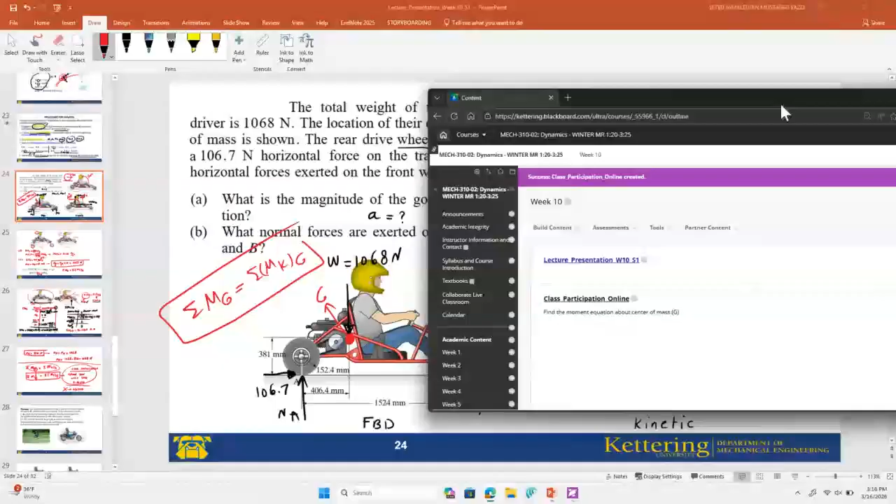Class participation online: find the moment equation about the center of mass. The due date will be today. You can complete this in 5 minutes; it's an easy one. I will set it to 3:30 p.m. This is out of 100. It will be closed at 3:30, and that's it. You will see here, I put it in week 10 class participation online. Find the moment equation about the center of mass and upload it in week 10. That's it.

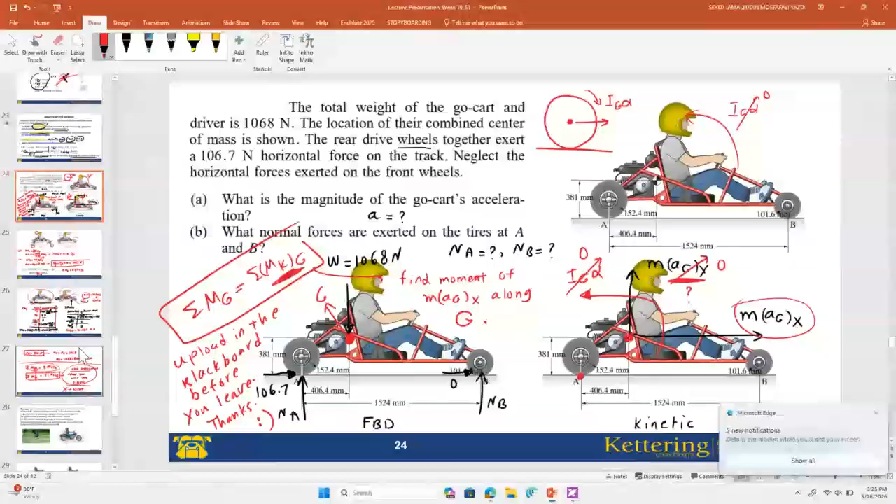About point G. That's it. Got it? No, this one is not the same as this one, because we changed the point. Now, instead of A, we move it to this point. Look here for your reference for this problem. I bring it here. Look, this is, sorry, this is

MAGX, okay? For the previous one, we found the moment about this point. The moment will be this multiplied by this distance. What I solved is MAGX multiplied by this vertical distance, 381 divided by 1000. However, this is about A. About G, it will be MAGX, but because this one passes through G, the distance will be 0. It is 0.

Okay, I'm happy that you got it. Other questions, everybody? I'm here. Just please make sure you upload. You have 3 minutes until 3:30.

For the first one, when you take the sum, is it multiplying them together? No, just take the sum, adding them together. For example, for the first one it is M1, for the second it is M2, for the third it is M3. For the summation of the moment about any point, I will add M1 plus M2 plus M3. Good.